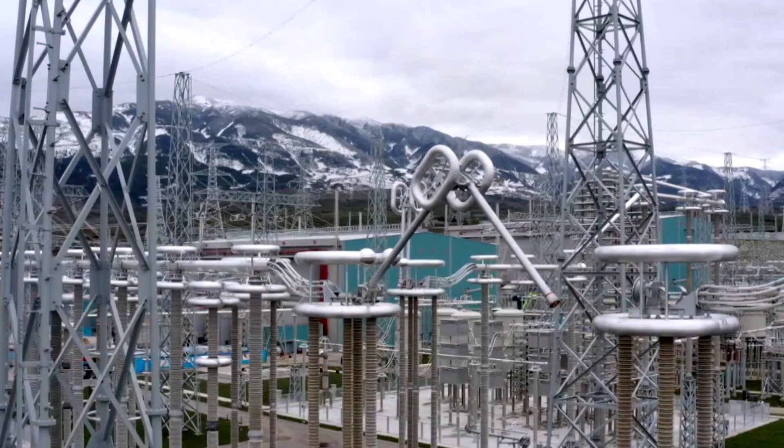With this end in mind, underground power plants are built on both banks, their domes of mind-boggling size. The world's first million-kilowatt generating unit has upgraded China's 2,500-kilometer ultra-high-voltage power transmission program countrywide from west to east. This represents another breakthrough for China's energy sector. Courageous builders scaling the summit to reach new heights in global hydropower.

The Jinsha River in June has entered the flood season. Going up the river in a boat, Baihetan hydropower station emerges, an impressive scene among the high gorges.

From the 80-meter-long water tank, the testers have obtained 36 pieces of technical data. The test results indicate that rapid water flow coming from the top of the dam would cause great damage.

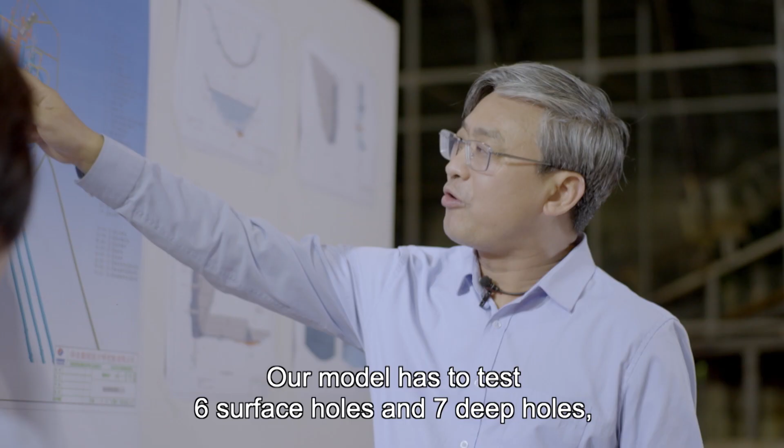To ensure that the double curvature arch dam can withstand once-in-a-century floods, engineer Peng Yu is assigned to design a flood discharge system that can dissipate energy.

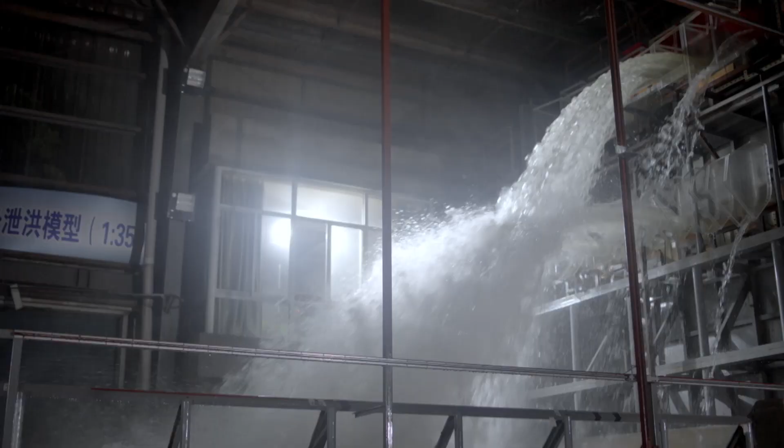Two dragons playing in water is a traditional Chinese artistic concept. Now, hydropower engineers give it a new meaning for the new era. After more than 100 experiments and calculations, Peng Yu and his team finally chose a trajectory bucket-type energy dissipation design fitted to the terrain of Baihetan. But construction will prove extremely difficult.

When the hydraulic climbing formwork machine reaches the 55th pouring floor, the countdown begins for the pouring of the 7 deep holes for flood discharge. The holes have an upturned special-shaped structure resembling a dragon lifting its head.

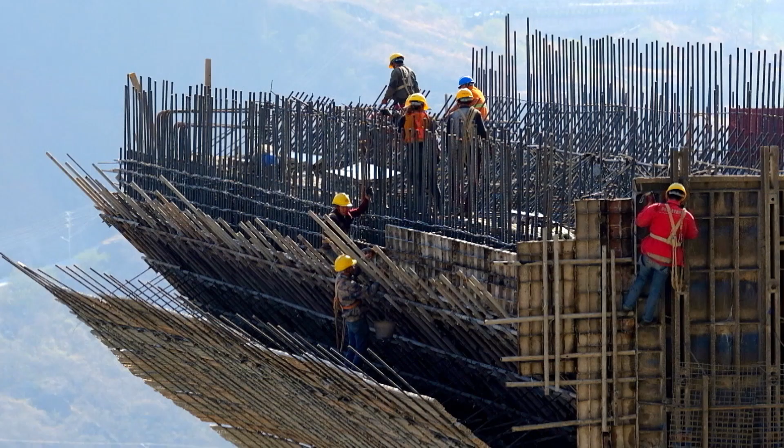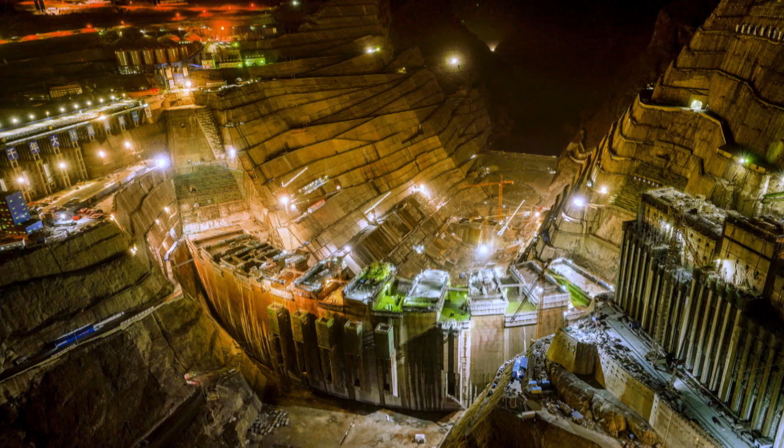Construction engineer Huang Chuyong has poured 2 dams before, but has never encountered such a large and complex structure. The pouring of the 7 deep holes represents an unprecedented engineering challenge. The pouring work officially begins. More than 1,000 tons of rebar were airlifted to the construction site. Over 100 workers get busily to work.

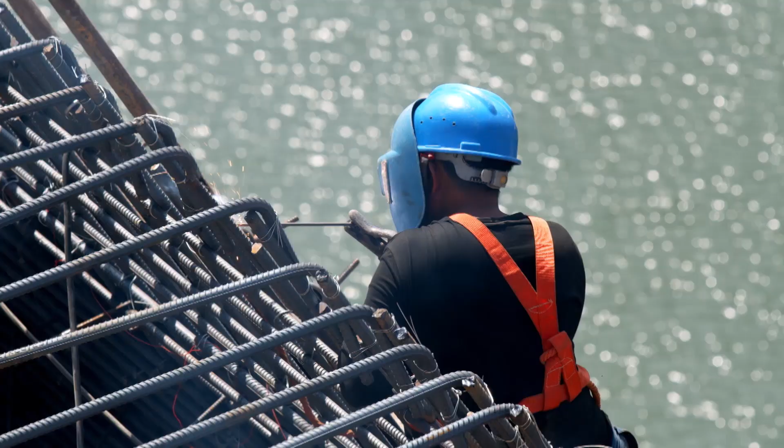The first task is to build the special-shaped steel structure. According to the design requirements, the workers have to bundle and weld 15,000 pieces of rebar, an engineering challenge as complex as handicraft weaving. What's more, the steel bars have to be bent into shapes. The bundling of each dragon head must be completed within 20 days.

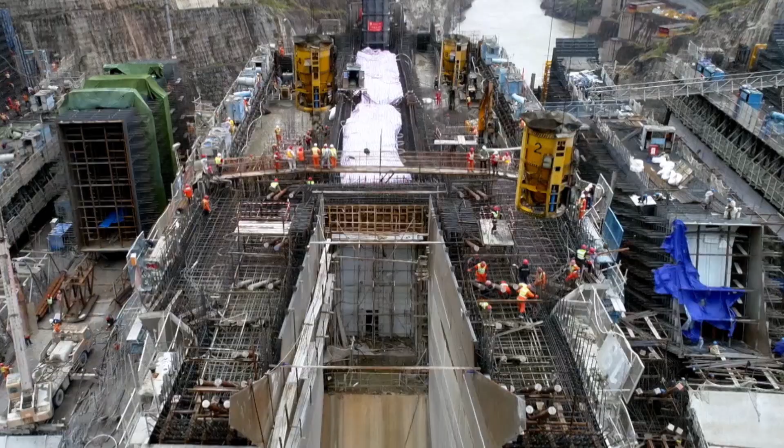The arch dam's 7 deep holes for flood discharge present another challenge that engineers must address: the discharge of 12,000 cubic meters at a speed of 47 meters per second. Water flow of such power has the potential to peel off the deep hole's concrete. Faced with this thorny issue, the designers came up with a simple and ingenious solution, using steel plates as an inner lining to protect the concrete.

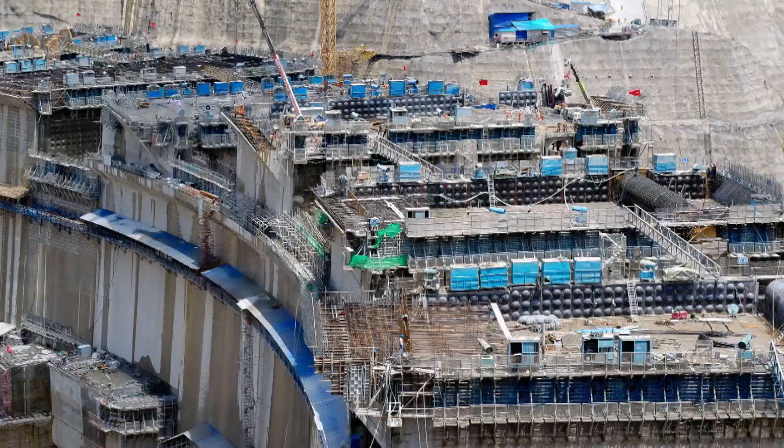The inner steel lining is a rectangular structure that's 5.5 meters wide, 14 meters high, and over 500 tons in weight. It can withstand the scouring of the currents, but it also makes the dam's pouring work extremely complicated. Each steel lining has over 20 sections. To weld them together takes at least half a month.

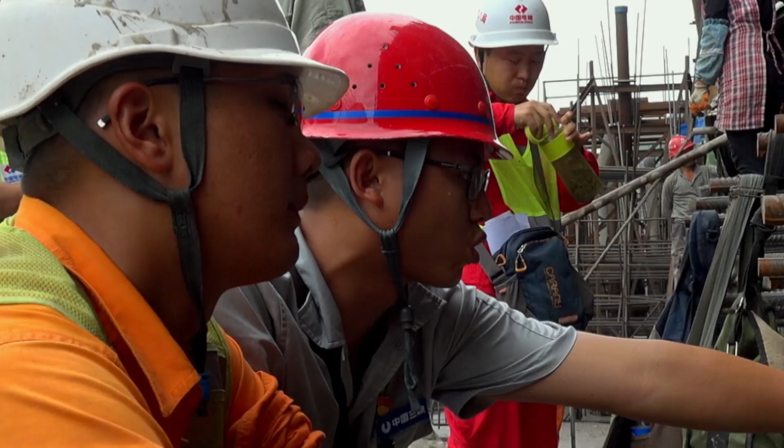The script of the team leader is a 32-page construction guide. According to this guide, dozens of different procedures related to deep hole pouring can be carried out in different locations simultaneously. The assembly and installation of the steel linings are processed like a prefabricated building. These steel structures, originally planned to be welded on site, were all transferred to a platform on the left bank and assembled there before being inserted into the deep holes for flood discharge.

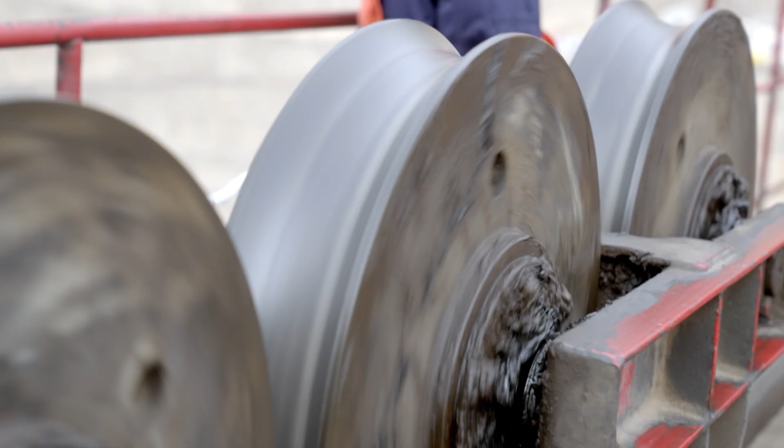Before the start of construction in the morning, the cable machine maintenance workers are already doing their dangerous and complicated work in the air. Their routine maintenance has special significance today. The steel linings that have been assembled need to be placed into the deep holes via the cable machine, the only means of transportation. And to lift the 50-ton structure, 2 cable machines have to work simultaneously. Safe operation is key.

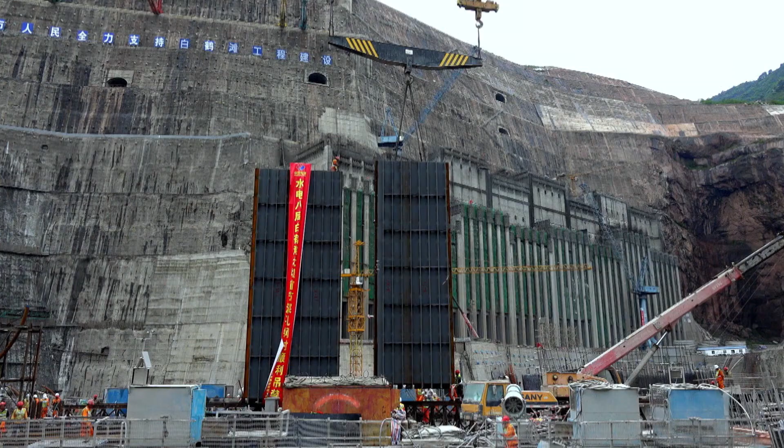The two female operators of the cable machines skillfully coordinate to slowly move the last oversized steel lining into place under the careful guidance of the ground supervisor.

The pouring work that follows isn't as dangerous as the high-altitude transportation, but the densely packed steel frames make it very difficult for construction workers to vibrate the concrete free.

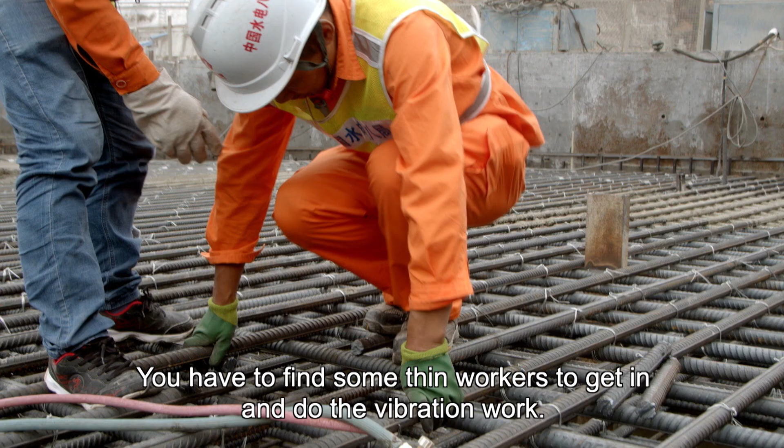The pouring of the deep holes must be finished in one go, strictly to time. Huang Chu-yong proposed a quick and simple method. Cut an opening at designated connection points to allow the workers to sneak in and move around the jungle of rebar.

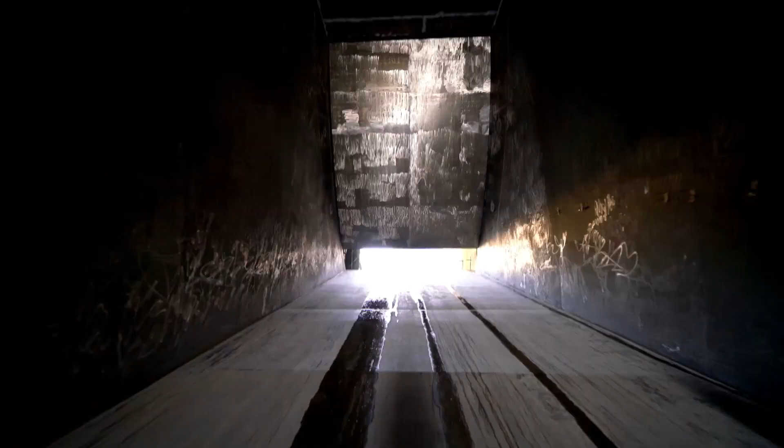When the gates of the 7 flood discharge holes were opened, the river water spewed out in powerful torrents.

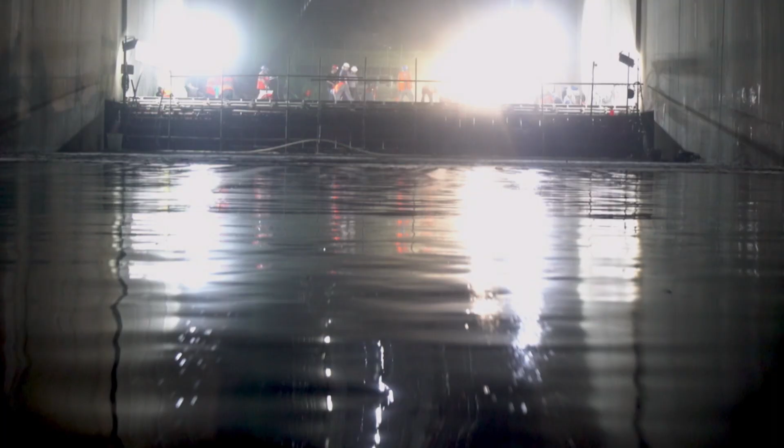On the left bank of the dam, 3 hydraulic tunnels have been excavated. Once in operation, they're capable of filling a lake of around 50 square kilometers in 15 minutes. But such an enormous discharge taking place at such high speed threatens to damage the tunnels unless there's proper protection in place.

The team led by Wang Xiaohai, who has over 30 years of experience in hydropower engineering, will take this challenge. They will ensure that there's no pressure throughout the 3 tunnels.

The water flowing at 47 meters per second will create a series of air bubbles on the uneven surface of the tunnels. These balloon-like air bubbles would explode instantly under high pressure.

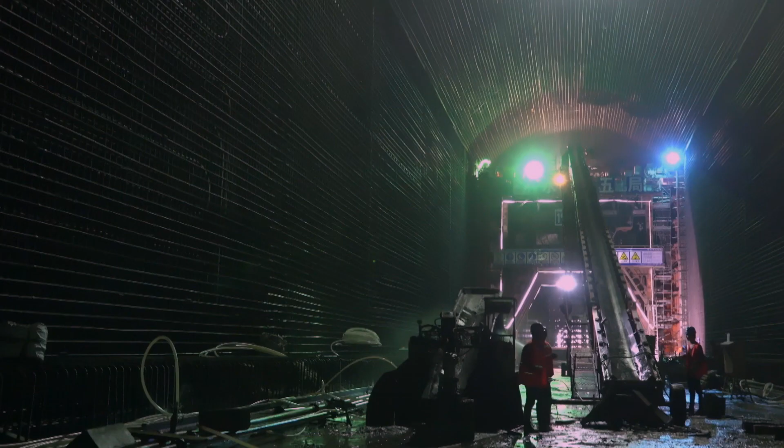But this pioneering design brings tough construction challenges. The vertical rock wall is almost 5 stories high. Even the conveying pump designed for long-distance pouring has trouble delivering normal concrete with its low water content and poor fluidity.

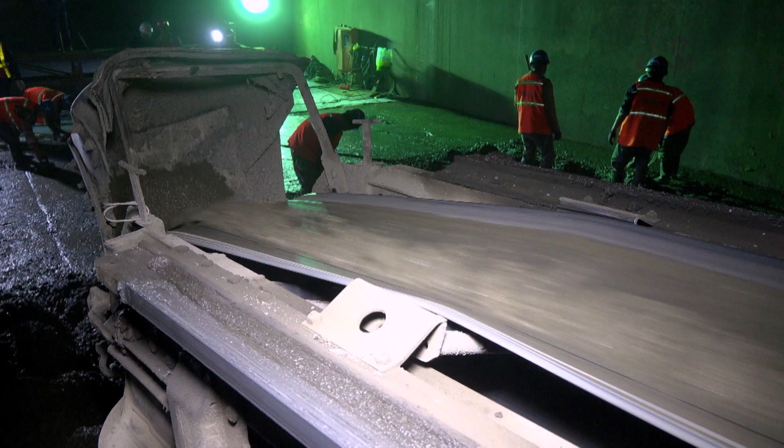This specially modified sliding trolley can perform multiple functions, including delivering the cement on the belt, applying it, and repeating the process. It's one of the 1,000 plus technical patents of the Baihetan project. The large section formed in one go has a mirror effect, reflecting very modern architectural aesthetics.

But now isn't the time to enjoy the view. The team leader on the site, Zhang Xiamin, knows that the big slope may affect material transportation for the second half of the pouring.

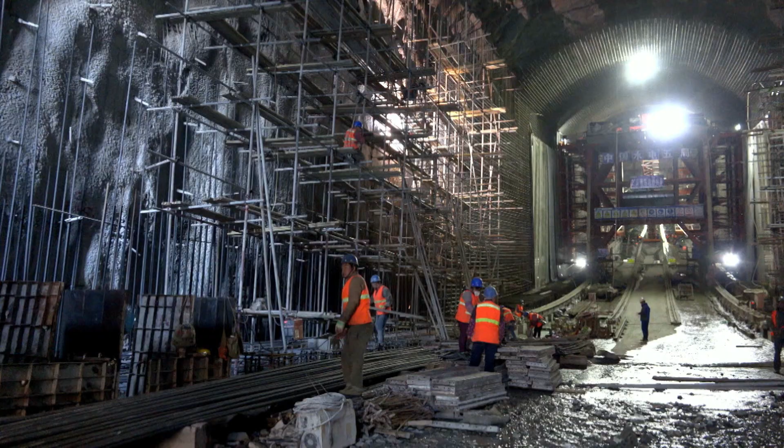This section of the tunnel, described by the designer as the Dragon Tail, is a smooth slope of more than 400 meters. Neither vehicles nor construction workers find it easy to stop on this ski track-like surface.

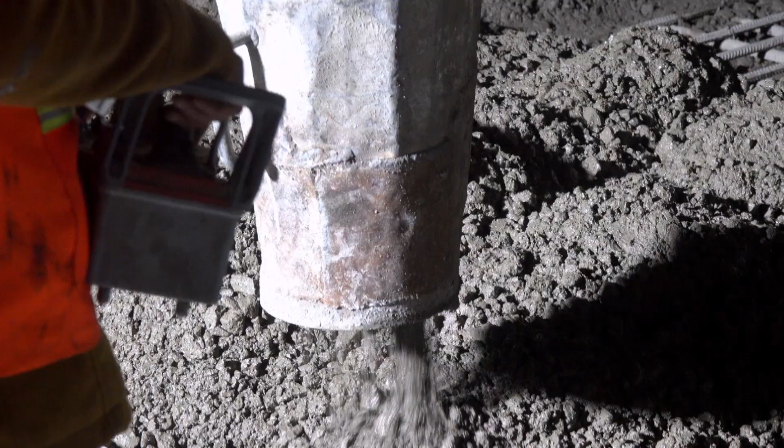After 4 months of research and modification, a transport system was figured out, which functions like a haul truck that can slide up and down automatically. With one touch, it can perform complex actions such as feeding, unloading, and even emergency braking. The last step is to finish the concrete surface of the bottom of the tunnel.

Polishing ground that hasn't completely solidified means working like a master chef.

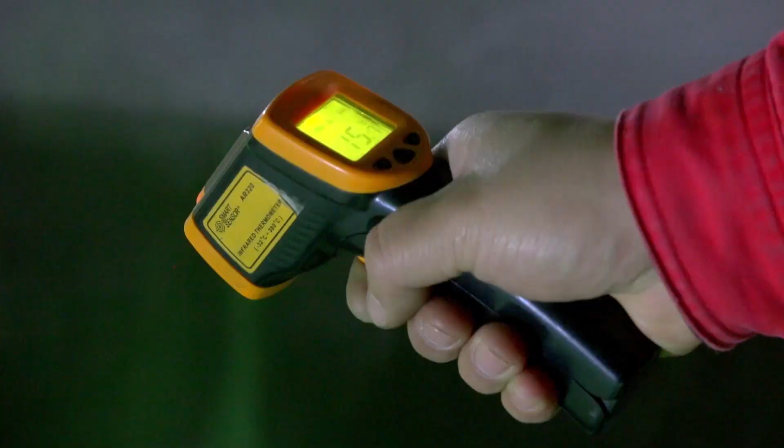To avoid leaving footprints on the soft surface, the workers wear homemade big slippers that disperse their weight. After 1,000 days and nights of hard work, the 3 pressureless flood discharge tunnels are ready to be tested.

After the test, Wang Xiaohai and his team need to evaluate the effect the concrete has in preventing air bubbles.

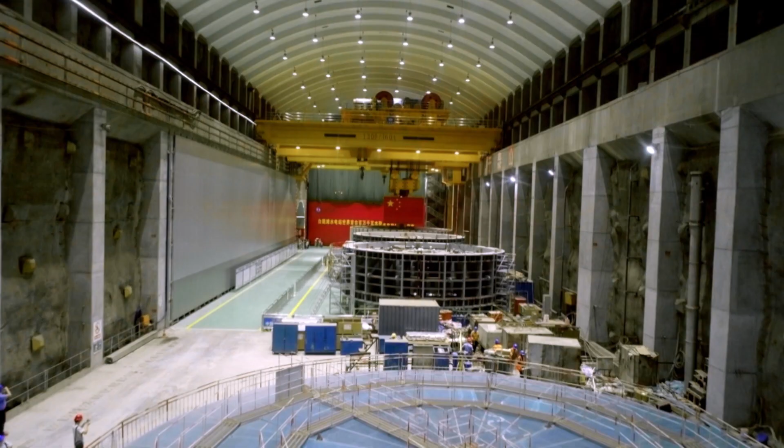Mighty oaks from little acorns do grow. Aggregating the wisdom and efforts of tens of thousands of builders is the core strength of this mega project. Today, the rotor of the first generating unit will be hoisted into position. Its success will be of great significance.

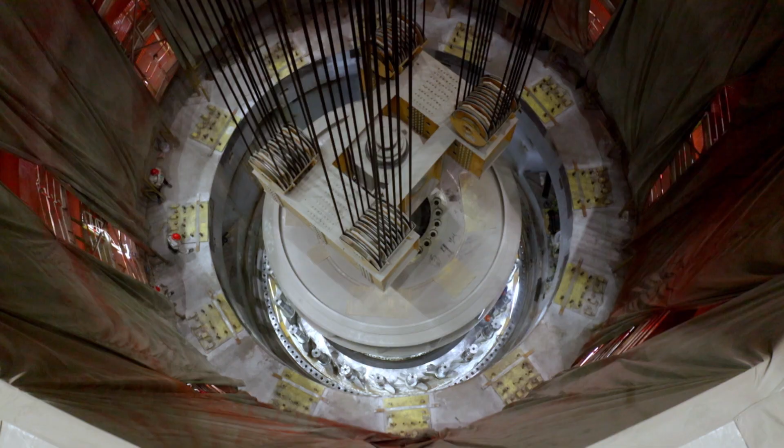A core part of the world's largest 1,000,000 kilowatt generator, the rotor is 4 meters high, 16.2 meters in diameter, and weighs 2,100 tons. Today's task is to move it from the assembly station to the first pit at the west end of the underground power plant, docking it accurately with the thrust bearing in the pit. Tien De Mei plays a central role in this task.

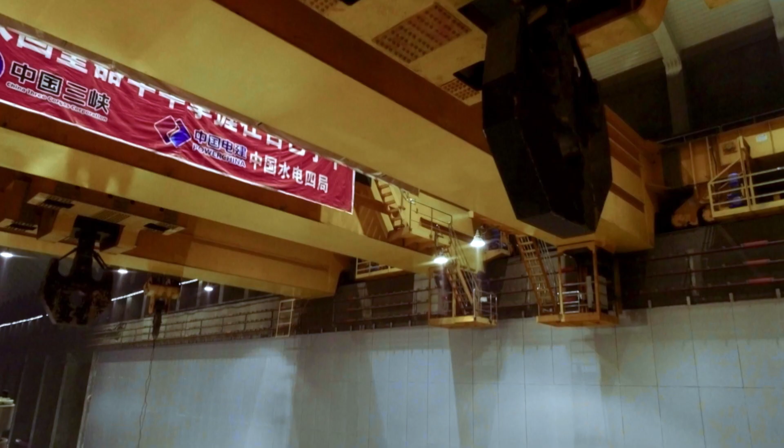Tien De Mei and her team operate the bridge cranes, which have a maximum lifting capacity of 1,300 tons. The rotor weighs 2,100 tons. Of course, the solution to this problem is known by all. As designed at the beginning, the rotor will be hoisted by 2 bridge cranes. This way, when necessary, the 2 bridge cranes can also work separately to increase efficiency.

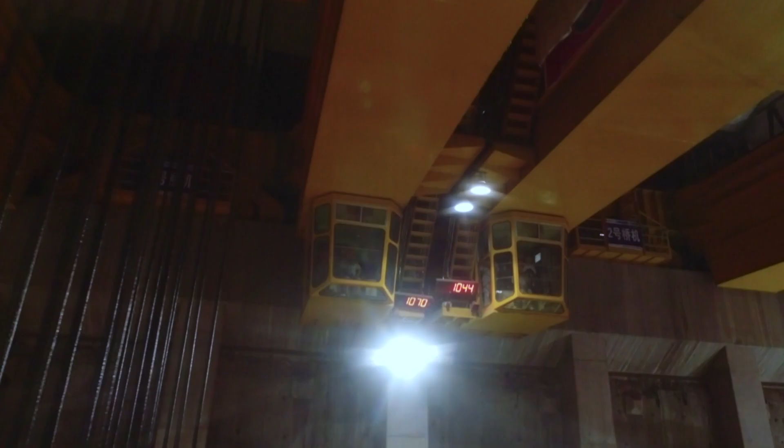According to the meticulous plans laid down at 10 a.m., the 2 bridge cranes merge perfectly into one, all under the control of Tien De Mei. As the best crane operator in the Bai He Tan power plant, Tien De Mei is now the center of everyone's attention.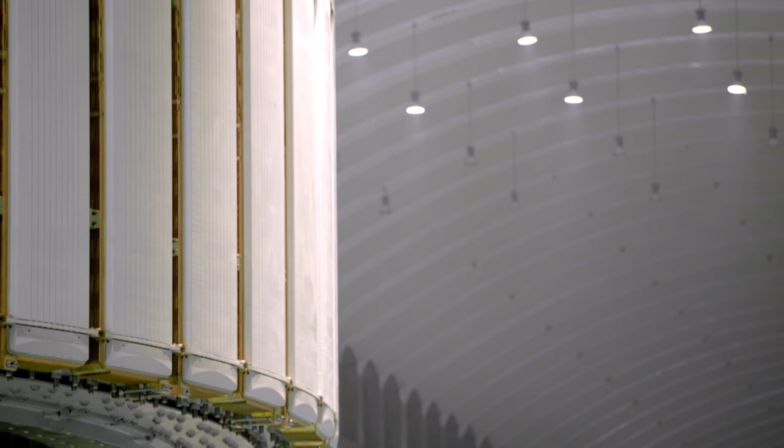At 11 a.m. sharp, the rotor is slowly lifted to the predetermined height of 5.8 meters. It's then moved horizontally over 330 meters. To ensure maximum stability, the whole process lasts over 50 minutes. By noon, the rotor has reached the spot right above the first pit. But the next step is the real challenge.

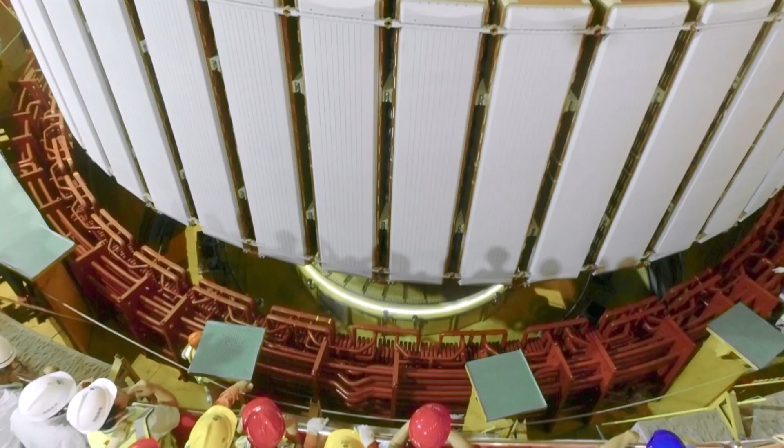The smaller the gap between the stator and rotor, the higher the electricity generating efficiency. For the 1,000,000 kilowatt generator, the gap between its rotor and stator is 5 centimeters. The limit, given a diameter of 16.2 meters for the rotor. There shouldn't be any contact between the two.

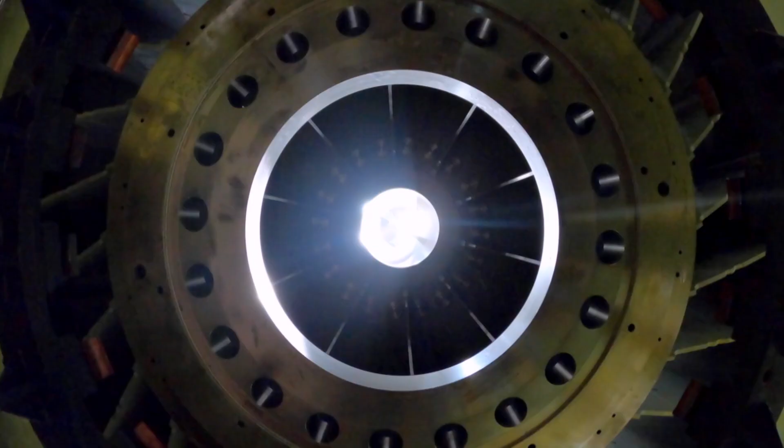Tien De Mei's 12 years of experience is playing a critical role at this juncture. With the close cooperation of ground personnel, she's finished the key operation in only 90 minutes.

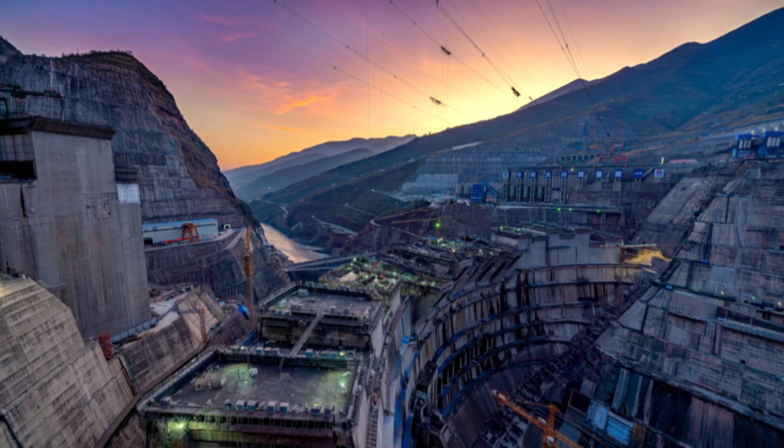With the successful installation of the first rotor, the Bai He Tan project has taken another step forward. The galloping Jinsha River gathers power here in Bai He Tan, which will be converted by 16 million kilowatt generating units into electricity and transmitted to the east coast of China. However, it's not easy to ensure the stable operation of all the generating units.

The water enters the volute of each unit with a discharge of 548 cubic meters per second and a flow velocity of nearly 10 meters. Should the unit suddenly stop operation for any reason, the flowing water will be blocked and its momentum will cause a very destructive reverse impact, professionally known as water hammer effect.

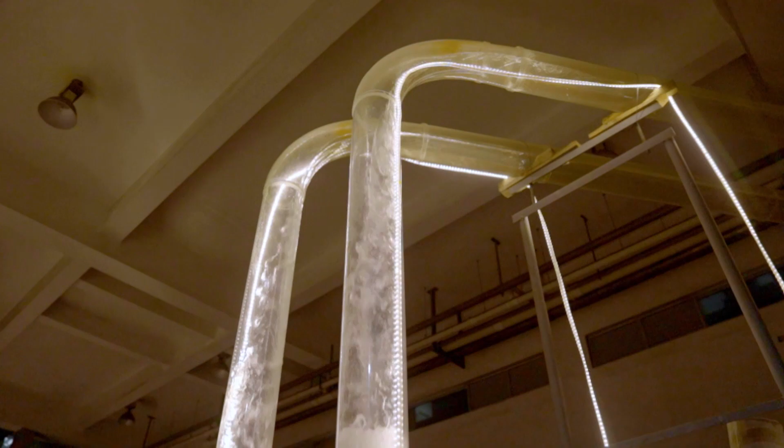Hohai University is a well-known institution in China for training water conservancy talents. The hydropower model here can test the strength of the reverse water flow should a 1,000,000-kilowatt generating unit suddenly stop.

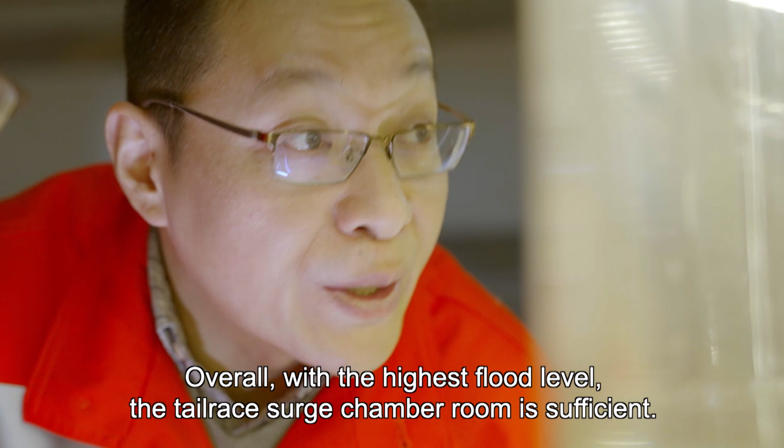After repeated simulations and experiments, Yang Fei's team determined the maximum size of the tailrace surge chamber as 48 meters in diameter and 122 meters in height. At the same time, to cope with the high ground stress of Baihetan, the shape of the chamber is designed as a cylindrical dome. No one in the world has ever built such a huge cylindrical tailrace surge chamber before, let alone in a place like Baihetan with its high ground stress and complex geological conditions.

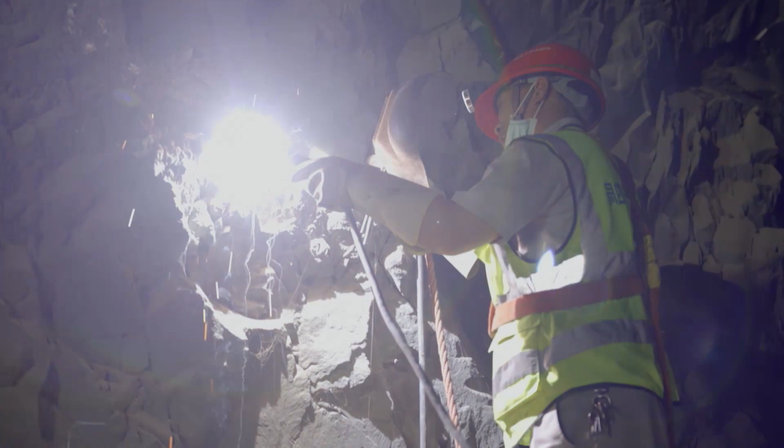The construction team, led by Chen Chu Huan, well known in the industry, is good at excavating underground caverns. The tailrace surge chamber at Baihetan is the most challenging task they've encountered so far.

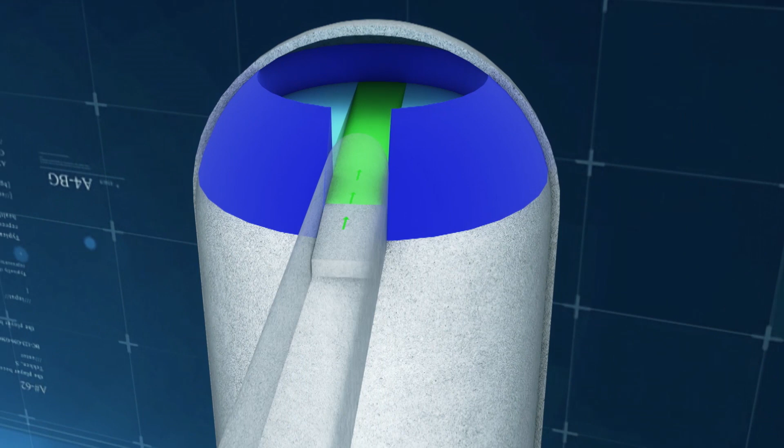The team first reached the top of the dome from a pilot tunnel and then began to excavate layer by layer. To prevent the dome from falling, they must support it while excavating. But as the excavated area increased, the ground stress release also gradually intensified. This hollowed-out structure was at risk of collapsing at any moment.

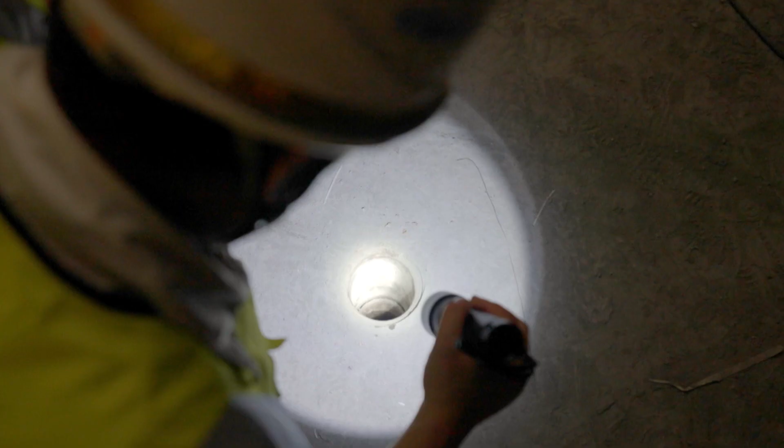Yang Fei and Chen Chu Huan drilled another tunnel 37 meters above the dome. They needed to use this space to install a ceiling support from the outside to hold the huge dome in place. These densely arranged anchor rods would turn the dome into a hedgehog. They would have to be inserted at the right angles to avoid the anchor cables.

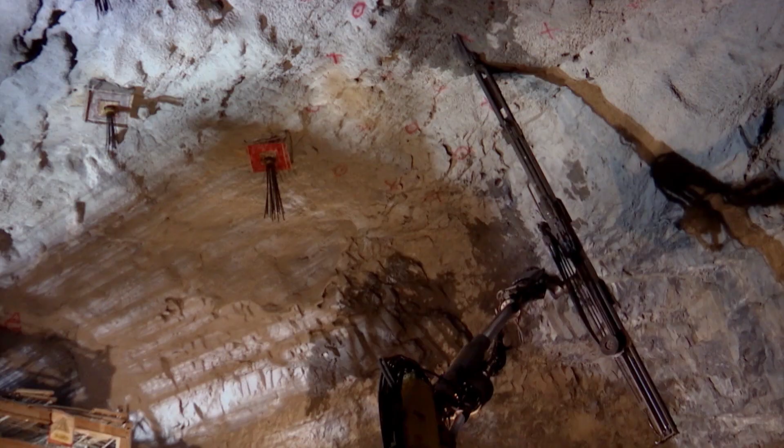This super large cylindrical dome involved very difficult and precise rock excavation, a task no easier than building a complex underground palace. The underground construction continued day and night. The hard work paid off. After dozens of drilling tests, Chen Chu Huan finally brought the deviation to about 1%, almost perfect.

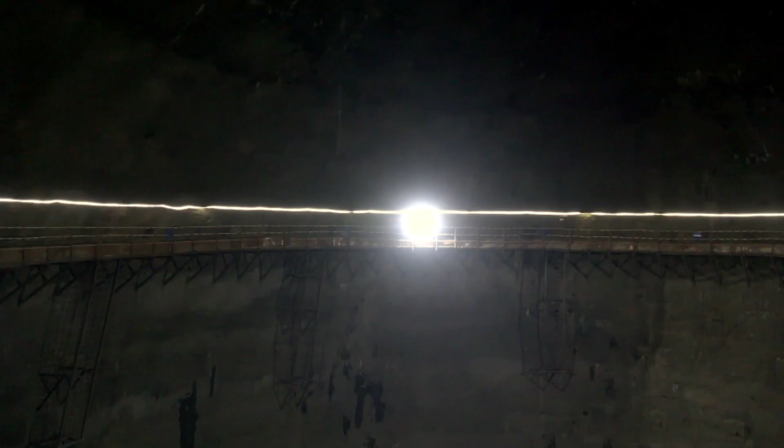The dome firmly secured in place, the construction team could resume excavation with confidence. In April 2019, after a year's hard work, the dome of the tail race surge chamber spanning 48 meters was finally done. A great design coupled with flawless construction. Yang Fei and Chen Chu Huan jointly presented this hydropower miracle. Although there are no stars on the ceiling of the dome, the underground builders view it as a magnificent palace.

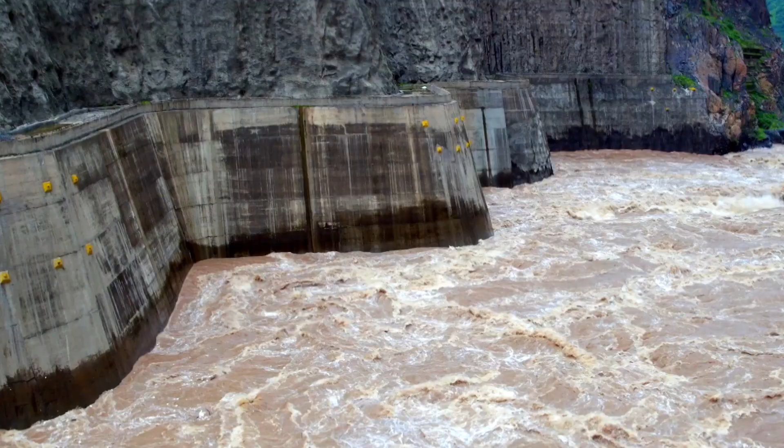On the banks of Baihetan hydropower station, 8 dome tail race surge chambers stand guard over the 16 million kilowatt generating units. They've tamed the enormous power of the river, becoming the world's largest group of tail race surge chambers of their kind. Standing under the giant dome, engineer Chu Jinpeng can feel the pressure inside the mountain converging towards the dome.

After the excavation of super large caverns, compressed rock may be liable to sudden release of stress. Such unpredictable rock bursts are a big headache for geotechnical engineers. After several days of monitoring and observation, Chu Jinpeng became increasingly worried. But whenever stressed, he would take a walk along the river and relax a little by looking at the sky and the mountains in the distance.

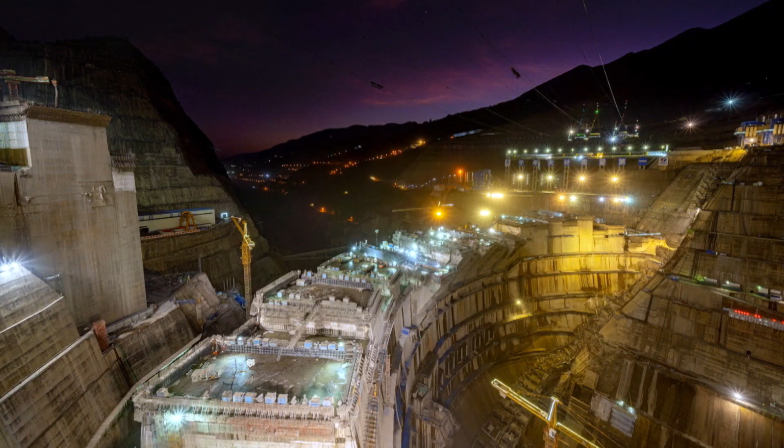The night is long, but dawn will come. When pouring began for the number 8 tail race surge chamber, a rock burst took place. Judging by recording of the sound, the rock burst was stronger than that in the previous 7 chambers.

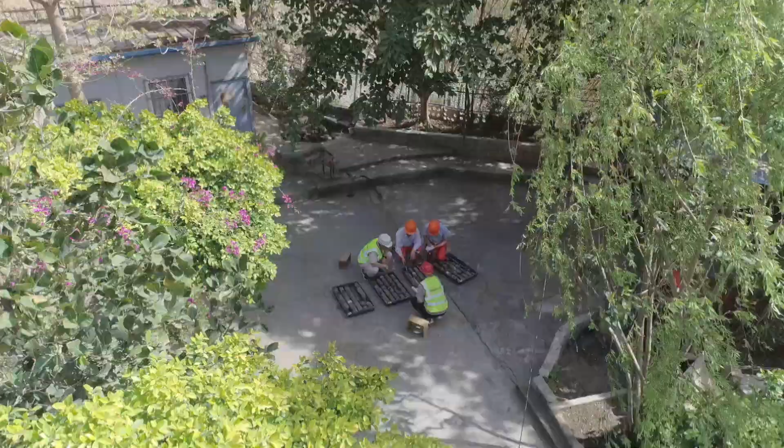The fracture depth inside the rock wasn't as bad as expected. The damage was still within the controllable range. But the opening created by the stress had to be sutured immediately to stop it becoming worse.

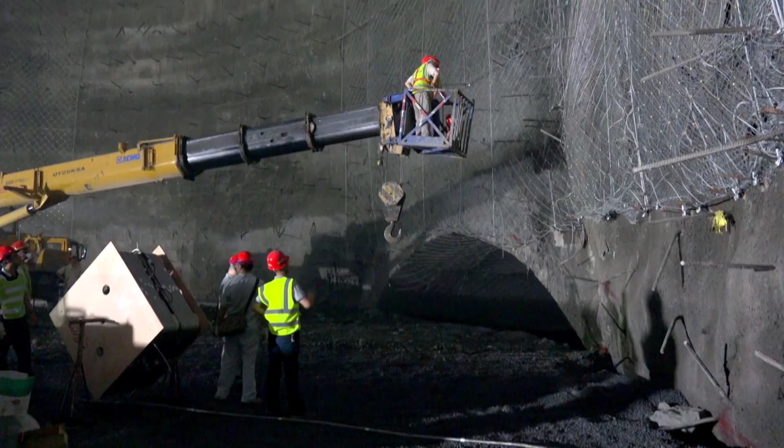After thorough assessment, the engineers finally decided to implement comprehensive system support treatment of the wound. This was nothing less than a surgical process.

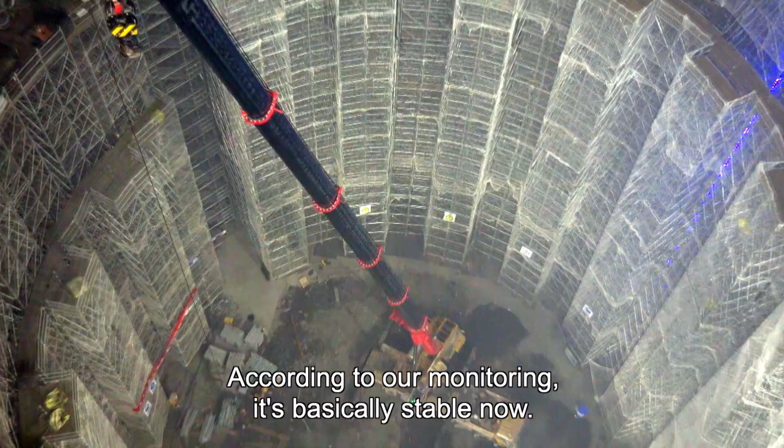5 months later, the reinforcement work was all done. It was an epic effort, people working day and night to create another miracle with their heroic spirit.

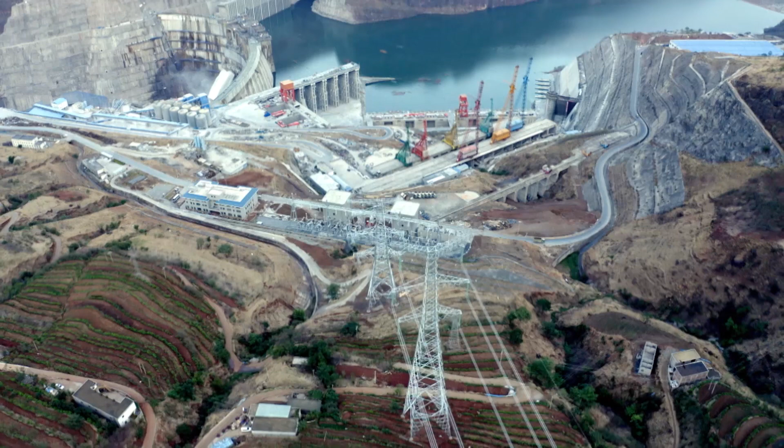Under the mountains, invisible to the human eye, Chu Jinpeng can feel the power of his project beneath his feet. Very soon, the 8 tail race surge chambers will be formally tested. The day is approaching when the Baihetan hydropower station will be connected to the grid. The expressway in the air that will transmit the huge quantity of energy is also ready.

The Butuo ultra-high voltage converter station deep in the Daliang mountains has the largest capacity in the world. The 800 kilovolt ultra-high voltage isolating switch being tested by technicians will be connected with the 16 million kilowatt generating units in Baihetan, 90 kilometers away.

This super heart of power transmission can deliver Baihetan's 16,000 megawatts of electricity to Jiangsu and Zhejiang provinces, over 2,000 kilometers away, in 1/100th of a second.

But in the afternoon, the remote test of the 80205 isolating switch ran into a problem. Pan Yong, who was in charge of the testing, rushed to the scene. Technical data indicated a faulty motor. The main wiring indicated abnormal position of the switch. The isolating switch is just a disconnector, but this 800 kV ultra-high voltage switch is very unusual.

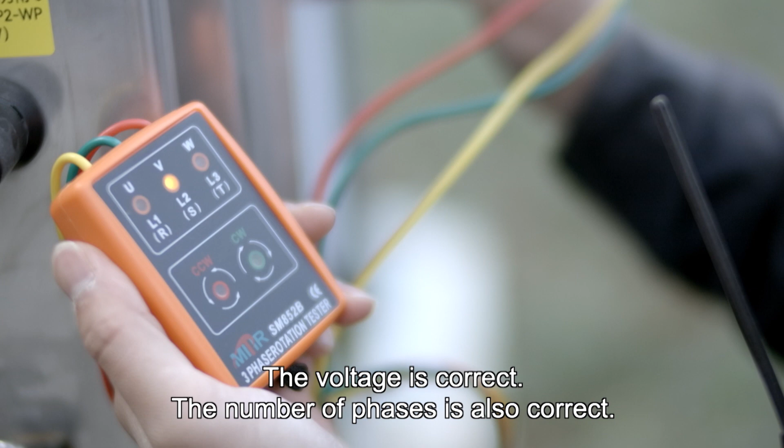After investigation, the problem was finally identified. Due to a loose wiring plug, the interlocking point of the motor protector had an abnormal electric potential. The issue was fully addressed by nightfall.

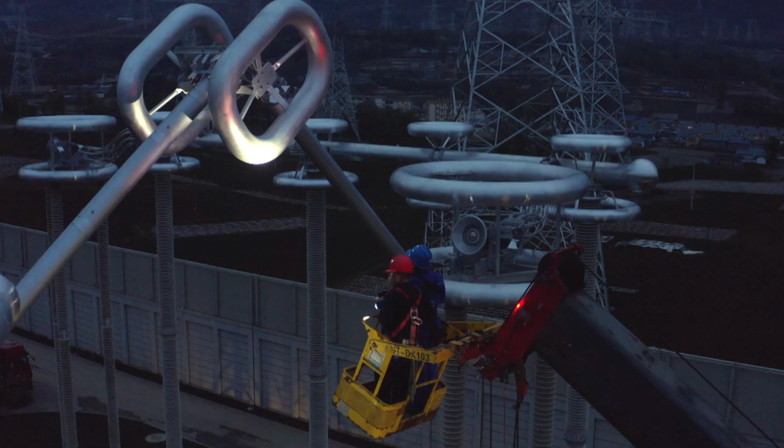At night, following instructions from the control room, the giant switch moved freely and accurately. At a stroke, 2 mega projects became officially connected, establishing an energy artery across China and marking an important milestone in the history of the world's power industry development.

On May the 31st, 2021, the long-awaited last concrete bucket arrived as scheduled. The builders gathered on the 289-meter-high dam to witness this historic moment.

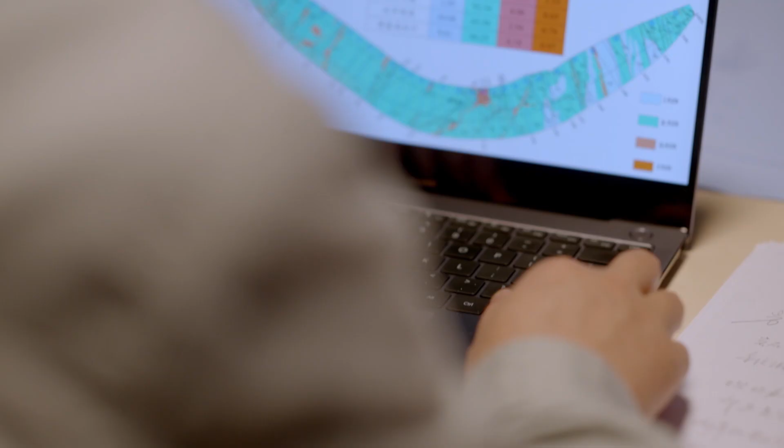In the monitoring center of the headquarters, engineer Chen Wenfu is routinely checking various technical indicators after pouring is done. The data indicate that the feat of a seamless dam is within reach.

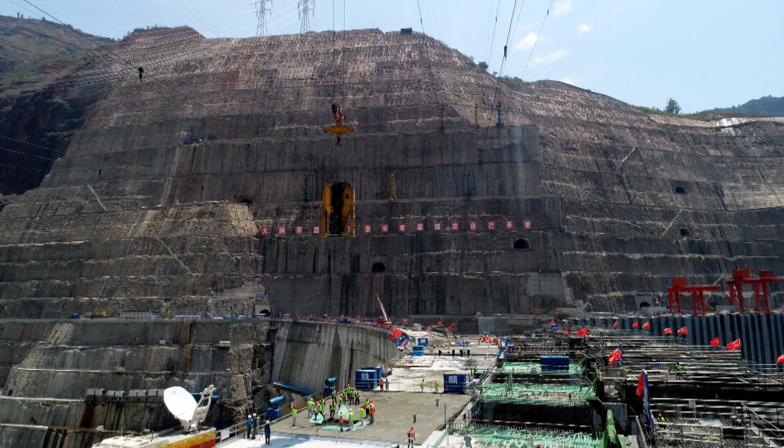Fu Wang is attentively guiding the bucket on site. This last bucket is the 90,000th one he's guided in the past 4 years. At this moment, under the workers' feet, the water level of the dam has risen to 760 meters. The underground caverns on both sides of the dam have withstood the anti-seepage test under high water pressure.

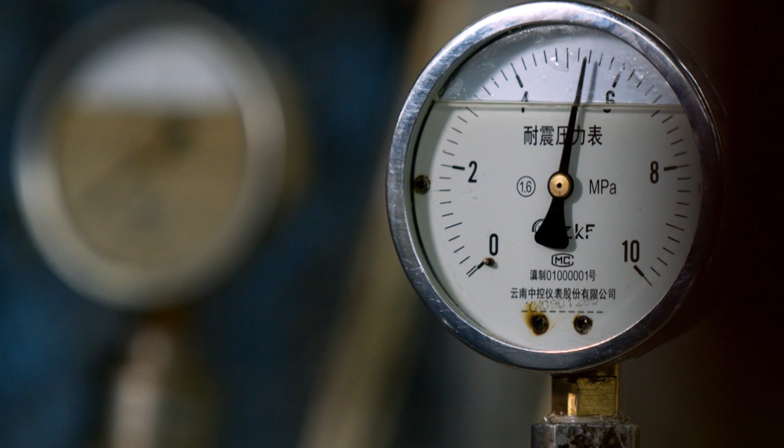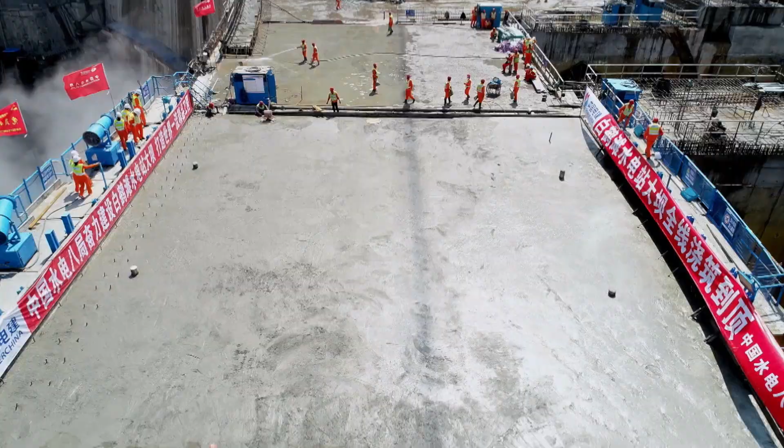The last bucket added 30 tons of concrete to the top layer. Now the dam, consuming a total volume of 8.03 million cubic meters of concrete, was complete.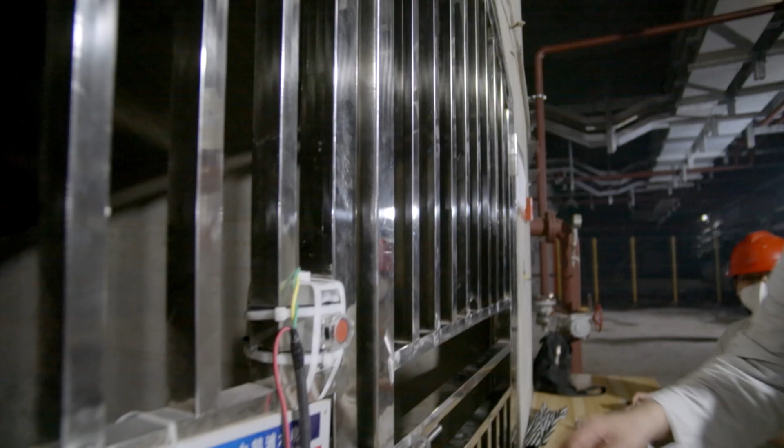The day of the big test has finally arrived. Da Sin Min, head of the electromechanical installation on site, checked the core parts of the unit again before starting the generator. There are over 100,000 parts in each unit. Any deficiency in the installation may affect the safe operation of the entire water turbine.

At 2 p.m., Kong Yonglin, the project manager, issued the order to start the power generation test.

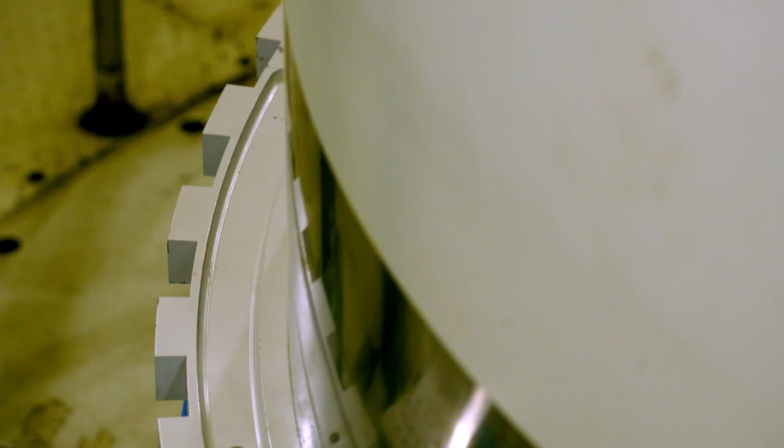The gate is slowly opened. The powerful river water rushes in, pushing the runner weighing over 300 tons and a rotor of 2,100 tons. The generating unit starts to operate. Very soon, the rotating speed has reached the rated value of 100%.

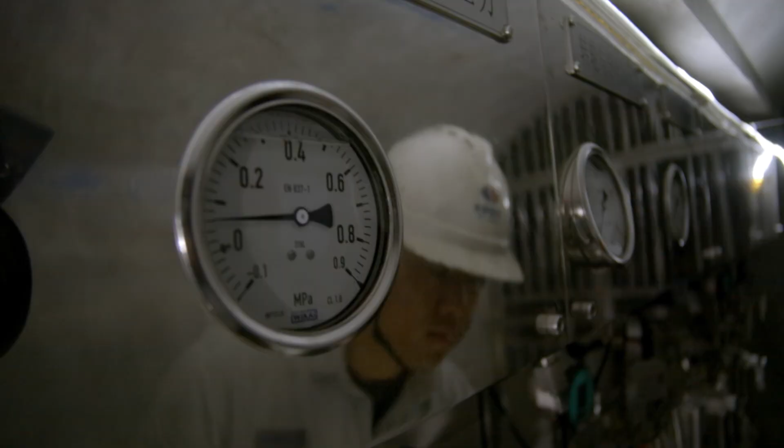It continues to run for 5 minutes. All monitoring data are normal, indicating that Unit 1 of Baihetan hydropower station is operating perfectly. The rotor is spinning in the stator at a high speed of 345 kilometers per hour. Now is the critical moment. The rotor charging process has begun.

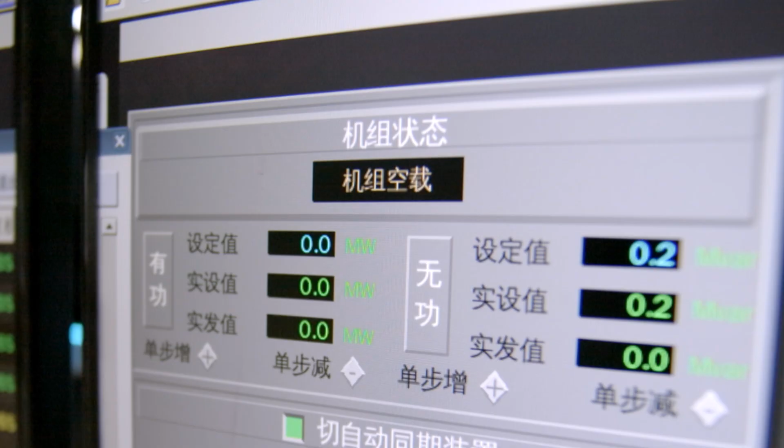With the injection of current, the magnetic field of the rotor gradually increases. Between the rotor and the stator, under the cutting action of strong magnetic lines of force, Baihetan begins to produce electricity. With the rapid increase of the rotor's magnetic induction intensity, the power generation of Unit 1 instantly reaches the rated power of 1 million kilowatts. The world's first million kilowatt generator has successfully passed the ultimate test.

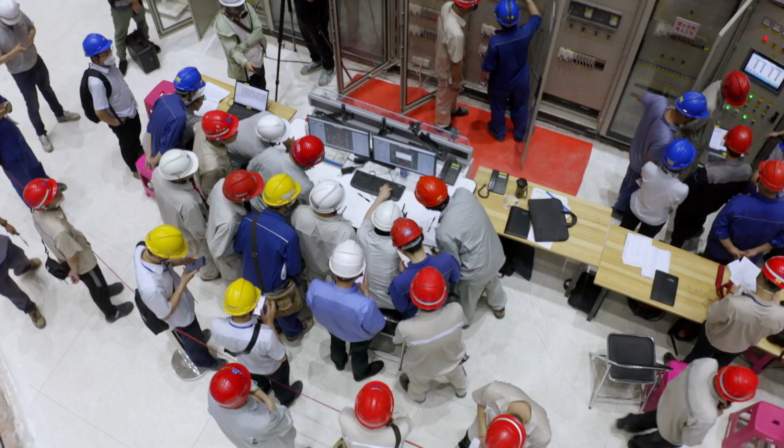This is a pivotal moment for all the Baihetan builders. The numbers jumping before their eyes prove that power is about to surge into the vastness of China's green energy sector. On June 28, 2021, as Baihetan's first batch of generating units were officially put into operation, President Xi Jinping sent a congratulatory letter as follows.

I would like to express my warm congratulations on the occasion when the first batch of generating units at Baihetan hydropower station started production safely and on time. Baihetan hydropower station is a major national project to implement the country's west-to-east power transmission program. It's the largest hydropower project under construction and the most technically challenging in the world. The world's largest single unit with a maximum capacity of 1 million kilowatts has achieved a major breakthrough in our country's high-end equipment manufacturing.

You have demonstrated the spirit of excellence, bravery, and selfless dedication, contributing to a major national project by working together to overcome difficulties. This fully shows that socialism was established through action, and the new era will be no different. I hope that you will coordinate and advance the follow-up work of Baihetan project, making greater contributions to the targets of carbon peaking and carbon neutrality and the comprehensive green transformation of economic and social development.

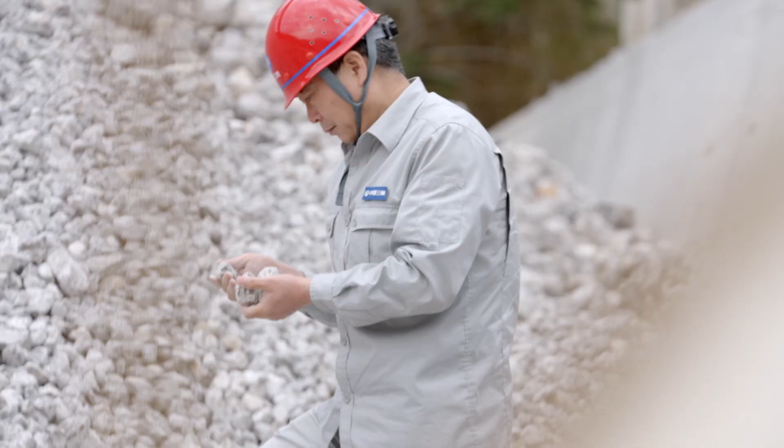Today, by re-evaluating nature, searching for gifts bestowed by nature, and harnessing green energy, Chinese engineers are constantly innovating new technologies. Their combination of wisdom and effort presents a vision for the future of green development, offering a Chinese solution to the global challenge of climate change.